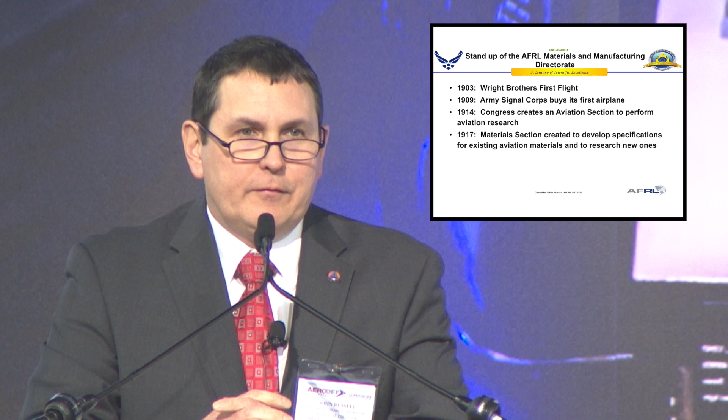So the first question I get is, the Air Force isn't even 100 years old, so why are you guys celebrating your 100th anniversary? It all goes back to the fact that the Air Force was a part of the Army.

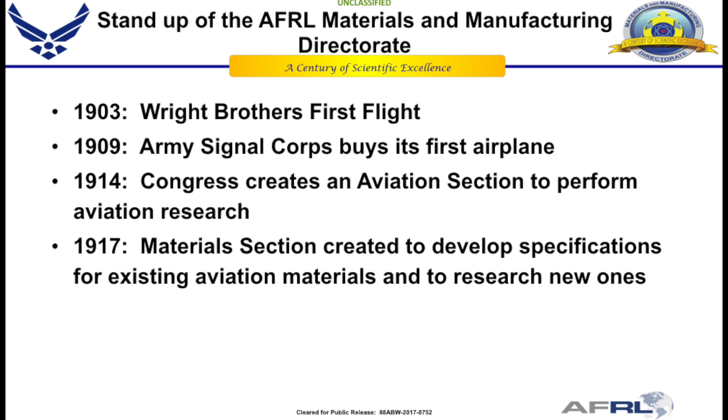If you look at the history, the Wright brothers flew their first plane in 1903. The Army bought their first airplane in 1909. After they bought the plane, they decided they needed to do some research to improve flight and materials. So back in 1917, Congress created a materials section within the Army Air Corps to develop specifications for existing materials for aviation and to research new ones.

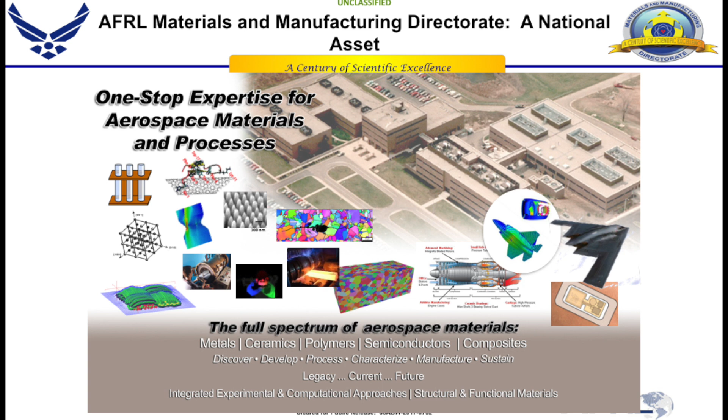So from those humble beginnings in 1917, the Air Force Research Laboratory's Materials and Manufacturing Directorate is a national asset. We do cradle-to-grave development of materials and manufacturing processes, from the basic research of fundamental materials in ceramics, metals, polymers, semiconductors, and even biological materials, through applied research and manufacturing development with the Defense Industrial Base, and even following those materials into the field to research when things go wrong, whether they were a cause, and how we fix them.

My part of the AFRL Materials and Manufacturing Directorate is the Manufacturing and Industrial Technologies Division. We're actually called out in law that the Secretary of Defense shall have a manufacturing technology program. We've got three key things we need to do to deliver technologies for the Defense Industrial Base and our warfighters. First is to develop transformational manufacturing processes, things like additive manufacturing and the digital thread, and apply them to defense problems.

Second is we need to be a transition partner for all of the technologies coming out of the Air Force Research Laboratories, things like advanced sensor pods, like the LCAAT, the low-cost attritable aircraft technologies program. And finally, what we're really known for is working with our acquisition and sustainment programs to help reduce the cost of those systems in development and out in the field.

We're just in the midst of wrapping up a major multi-year investment working to reduce the cost of the F-35. Now we're looking to the future, some of those new planes coming out from the Air Force, a lot of them classified, to drive down their costs as well.

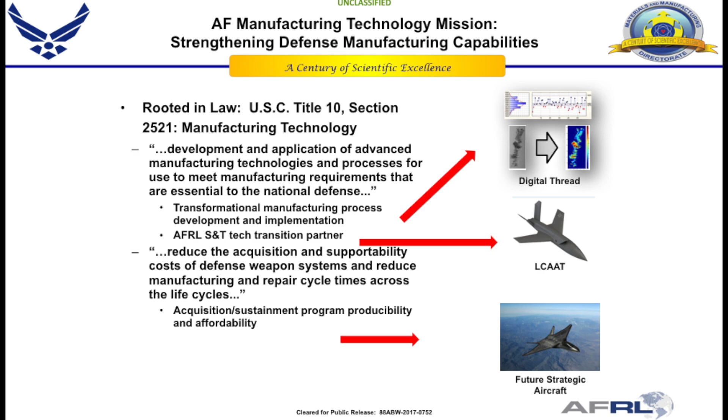So NC machining has its roots in an Air Force-funded project back in the 1950s. The Air Force actually had a contract with MIT to enable easier machining of complex geometries in 2D and in 3D. The technology was first demonstrated in 1952, and industry finally started to develop their own machine designs in 1955. You cannot imagine today trying to do modern aerospace production without NC machining. There's just no way some guy with a manual drill bit could do the things we ask of the industrial base today.

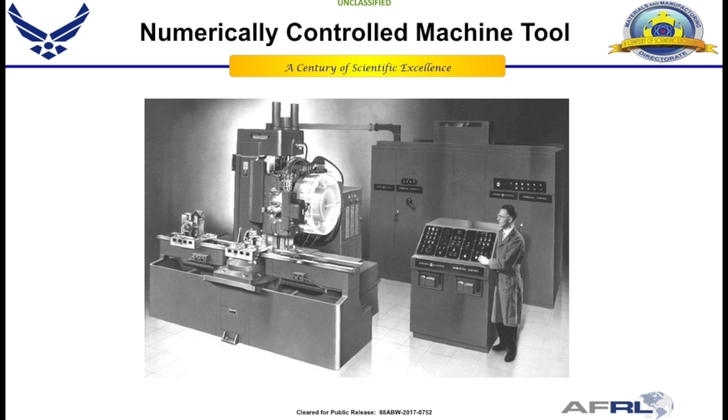We do a lot with the sustainment side of the Air Force as well. Spare parts is a big issue for the Air Force. If you look at the rotors in turbine engines, the original plan was that these things would have a certain life. After 5,000 TACs or 10,000 TACs or whatever, you would just throw that part away because it had reached the end of its design life.

But we knew that a lot of these rotors still had significant life left. So we worked to develop fatigue crack models. We worked to develop non-destructive inspection tools to determine how much life was left in these discs, to see if we could get another maintenance cycle or two out of them. And this had some tremendous cost savings for the Air Force, to the point now where we can't even keep track of the cost savings involved.

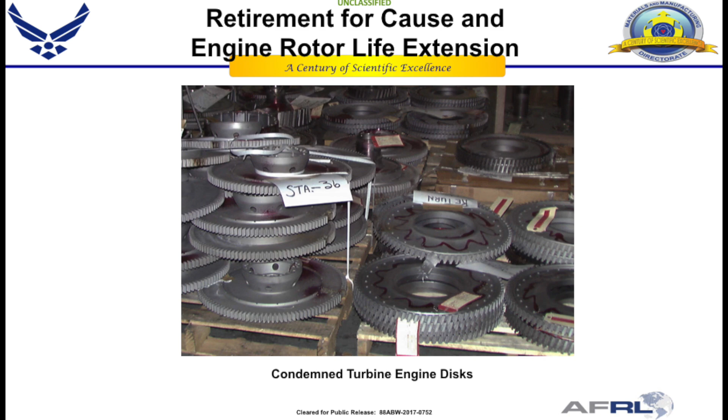Everyone knows what Lean is. First deployed as the Toyota production system.

Lean manufacturing made its way throughout the automotive sector and many industrial sectors, but in the 1990s the defense industrial base did not really take advantage of Lean principles. So in the late 90s we established the Lean Aerospace Initiative in partnership with MIT and a host of industrial companies.

A couple highlights here. First is the Joint Direct Attack Munition. Following the Second Gulf War, we needed a lot of JDAMs replaced, and the factory wasn't capable at the time with its current processes. So we sent a team in to work with Boeing to lean out these processes and get them up to rate as a modern production facility.

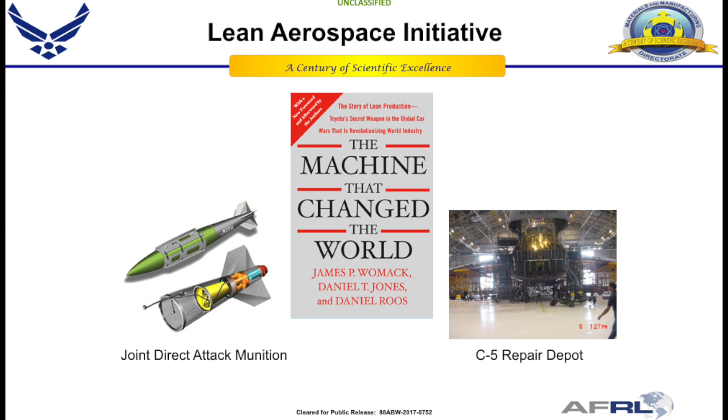The other side of the coin is the sustainment side of the Air Force. If you've ever been to one of the Air Force depots at the time, a lot of people were doing a lot of hand work, not necessarily efficiently. We started with pilots on some maintenance stations on the C-5 and the F-15, and that has changed into today, where the entire maintenance line for almost every Air Force depot is founded on Lean principles. We've greatly increased our throughput, meaning more airplanes available for our warfighter today.

Something that's near and dear to my heart is the work we've done over the years in organic matrix composites. AFRL has had its hand in the development of composite materials for aerospace in general. ManTech in particular has taken those materials and made them a true industrial process. Our work sponsoring funded research with industry on fiber placement is now in wide use today. You can't build an F-35, a 787, or an A350 without fiber placement.

We've also helped launch the current generation of out-of-autoclave materials alongside the AFRL S&T side of the business, as well as DARPA and other entities. At first we did them for low volume aerospace production, and they're slowly making their way into new aircraft today. We've helped develop the design and manufacturing processes to enable these large-scale composites. In fact, the design of the 787 barrel has a lineage to some design work we did with Boeing back in the mid-1990s.

Then finally, one of the shining stars of what we did was the Composites Affordability Initiative, where we developed the design and manufacturing processes to enable large, integrated, and bonded composite structures. This $150 million program developed design tools, manufacturing methods, quality assurance tools, and large-scale demonstrations to prove the feasibility of bonded composite primary structures. The capstone of all that was the X-55A Advanced Composite Cargo Aircraft.

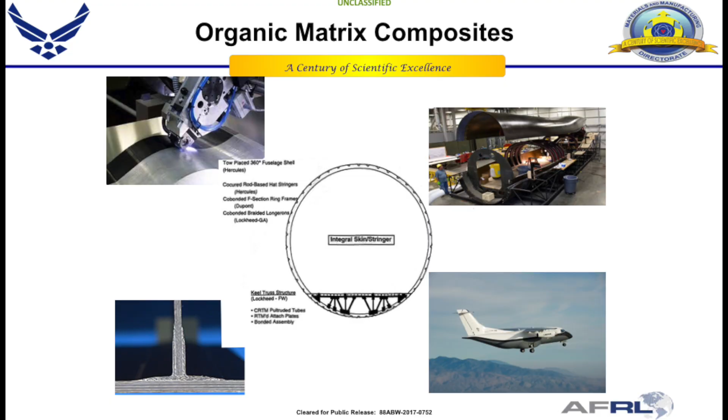One of the things we're known for is being the godfathers of the manufacturing readiness assessment. Back in the mid-2000s, we got a lot of grief from the big Air Force saying, well, this technology is TRL-6, so how come we're having such a problem once it gets to our system? Just because something is at TRL-6 doesn't mean it's manufacturable. So we developed, with a team across DoD, the manufacturing readiness levels and the threads underneath them, to make sure you know how mature your manufacturing processes are.

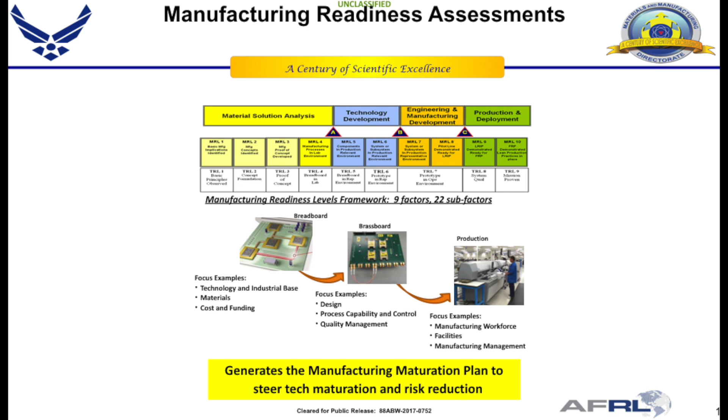These are now standard operating procedures for major weapon systems. They have to meet certain MRL milestones as they reach certain acquisition milestones. We're also developing tools so that even early 6-1 research can start to think about manufacturing as they move forward. So really the bottom line is, what we're judged for in the manufacturing technology division is our impact on the weapon systems.

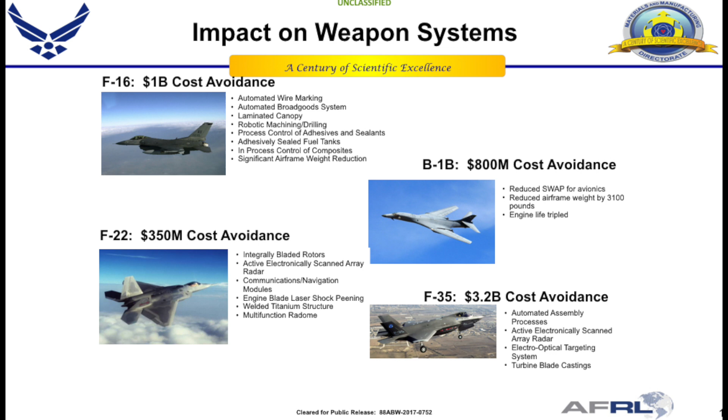Here are some examples of the weapon systems I can talk about. Going back as early as the F-16, we've had significant impact on reducing the cost of these airplanes: $1 billion over the life of the F-16, $800M for the B-1, $350 million for the F-22, $3.2 billion for the F-35. Really some astounding numbers. We've touched everything from wiring to metal processes, turbine engine processes, and composite materials, all across the board.

So that's a look back at our past, and we're certainly proud of the work we've done over the past 100 years. But you need to look to the past to think about what's going to happen in the future. There are a lot of challenges now as the Air Force moves forward.

So what's next? First, the Air Force has designated several technologies as game changers. How do we fundamentally change the way we fight to keep the fight unfair in our advantage? Hypersonics—we have to go really, really fast, Mach 5 plus, which will have a big impact and significant manufacturing challenges. Directed energy—everybody would love to have a gun that doesn't run out of bullets, and that's what directed energy has the promise to be. Autonomy—a lot of people think autonomy and think of drones that fly themselves, or the Terminator, or things like that.

But it's more than that. It's about having that R2-D2 in the back of your X-Wing to help Luke Skywalker, the pilot, do his job. It's about having maybe a fleet of unmanned air vehicles alongside the wings of an F-35 or an F-22 to help augment what that pilot can do.

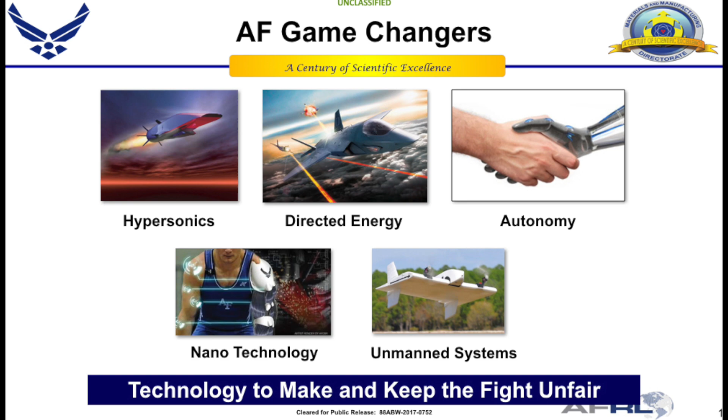Nanotechnology certainly has had a lot of promise, and since really starting to gain traction in the mid-1990s, the Air Force is still looking to that today. Then unmanned systems in general. There are a lot out there now, but I think we're just scratching the surface in terms of what we do with them.

Another thing DoD-wide that people are looking at is called the third offset. Again, this is a way to take a look at a fundamental change in how we operate as a warfighting force. The first offset technology being nuclear weapons when faced with superior numerical disadvantages as we looked to the Soviets across the East German border. The second offset being a combination of stealth, precision-guided munitions, and GPS.

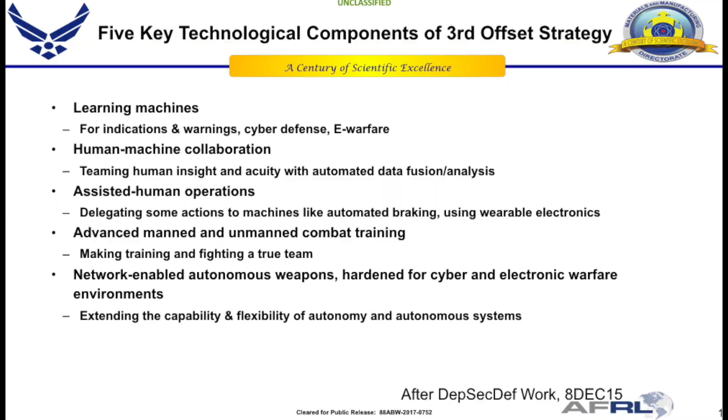And this third offset, they're looking into learning machines, human-machine collaborations, and assisted human operations, kind of the things I alluded to with the autonomy coming out of AFRL. So those are the warfighting concepts we're looking at, but we're also taking a look at what are some of the trends going on out there in industry. Certainly, Industry 4.0 and the brilliant factory concepts are things we're keeping an eye on. How do we take those kind of concepts into the defense industrial base to take full advantage of that?

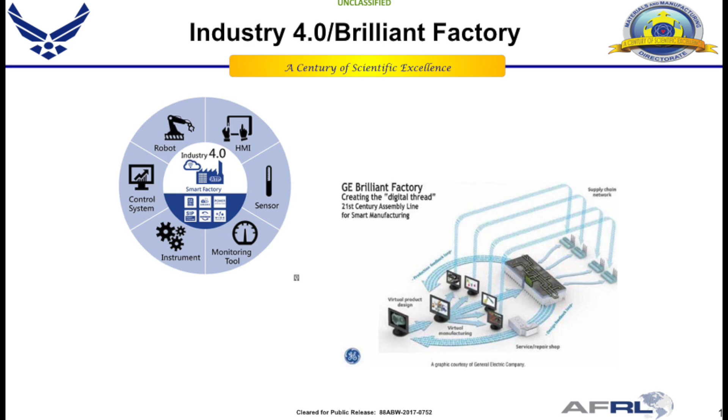So with all that, some future strategic focus areas we have. The top is more technology-wise. Certainly additive manufacturing has big promise. It can change the way you do business. You can actually make parts that you can't make with conventional means. So how can we take advantage of the infinite design flexibility we have with additive to do some unique things to improve the capability of our systems?

The digital thread - manufacturing gives off the most data of any sector of our society. How do we take that data and do something actionable with it so that we can improve not only how we manufacture our systems, but how we maintain them throughout their life cycle, whether it be a 20-year cycle for a Predator or a 90-year cycle for a B-52.

And robotics - certainly robotics is a very mature technology, but as you look to aerospace, we're only going to build 100 of the next bomber or 100 of the next tanker or transport. How do you make robotics affordable in a low-rate production environment? How can we get them to be more flexible, more easily reprogrammable? How can a robotic cell be able to do multiple things so that you can reduce your non-recurring costs?

And then warfighting-wise, there are several things we need to keep our eye on. First of all, hypersonics. Right now, the industrial base for our hypersonic cruise missile does not exist. And the Air Force has some ideas of launching a program of record in 2020, and that's not that far away. How do we get these exotic materials that withstand the temperatures required for hypersonic flight to be manufacturable

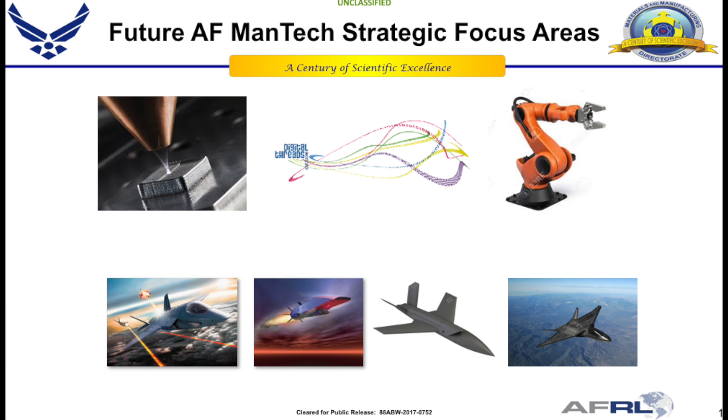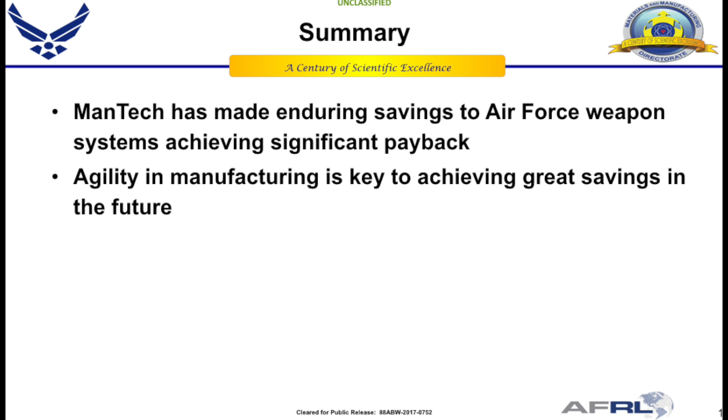So in summary, the Air Force's manufacturing technology program has made some enduring savings to the Air Force weapons systems over the years. We've achieved significant payback of the program. And as you look to the future, this agile manufacturing is going to be critical to achieving more savings in the future.